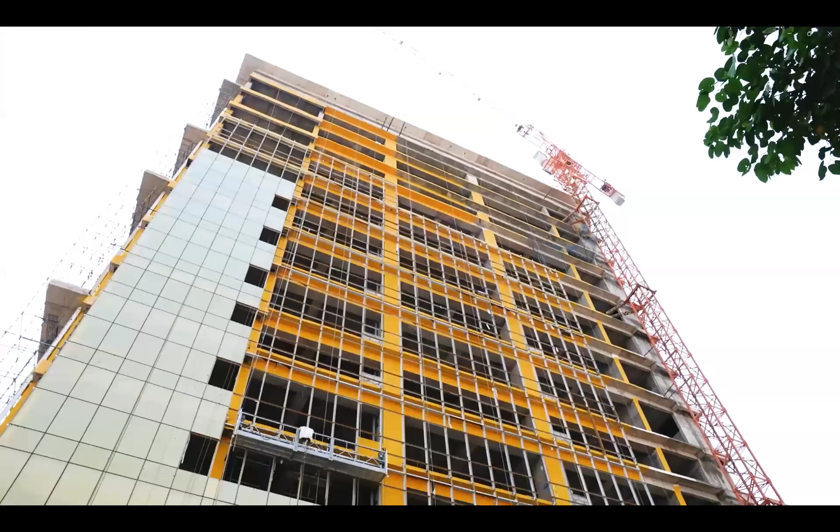The Indian Association of Structural Engineers, also known as IAStructE, was conceptualized and constituted in the year 2002 by a group of senior professional structural engineers from all over the country. IAStructE is registered under the Societies Registration Act 21 of 1860. IAStructE is a national apex body of structural engineers in India with a mission to promote structural engineering profession and cater to the professional needs of the structural engineering fraternity.

In the short span of two decades, the association has attained an eminent position in the professional field. Its membership is valued very highly in the profession. Since inception, IAStructE has been led by eminent structural engineers like late Shri Mahendra Raj, late Shri Kumar Ghosh, late Shri Subhash Chand Mehrotra, Professor Mahesh Tandon, Shri Manoj Mittal, Professor R. Pradeep Kumar, and Shri Alok Bhowmick as its president.

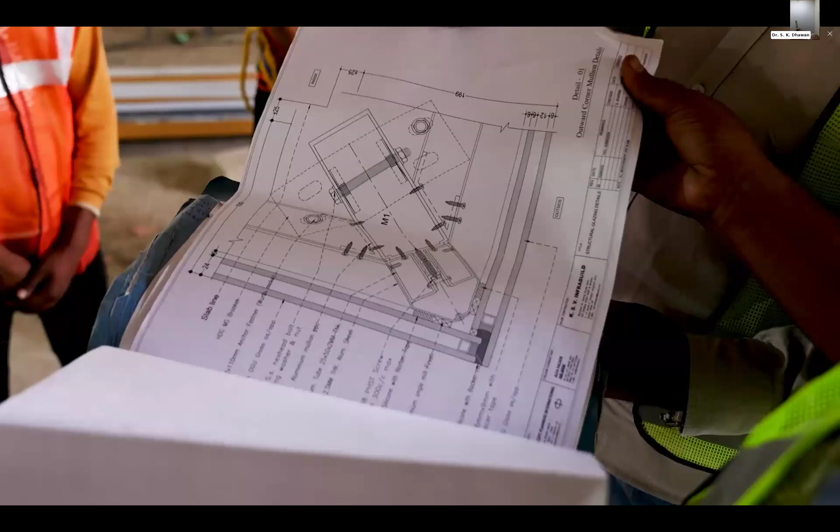IAStructE is a permanent member of the Engineering Council of India and interacts with the government on professional and policy matters related to civil and structural engineers. To expand its reach, IAStructE has collaboration with various international professional like-minded associations and institutions like IStructE UK and FIB for strengthening global connections and professional exchange.

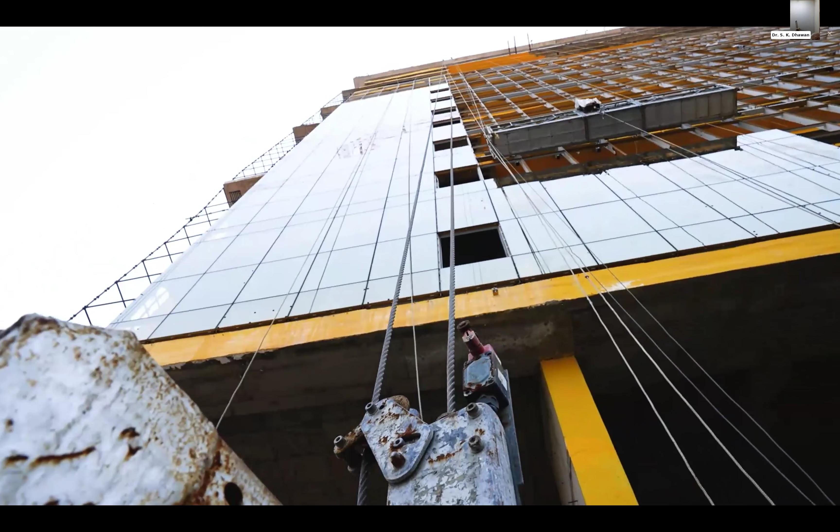IAStructE's prime objective is supporting and protecting the profession of structural engineering by upholding professional standards and acting as a mouthpiece for structural engineers in India. IAStructE endeavors to ensure that its members develop the necessary skills in structural engineering and work to the highest standards by maintaining a commitment to professional ethics and standards.

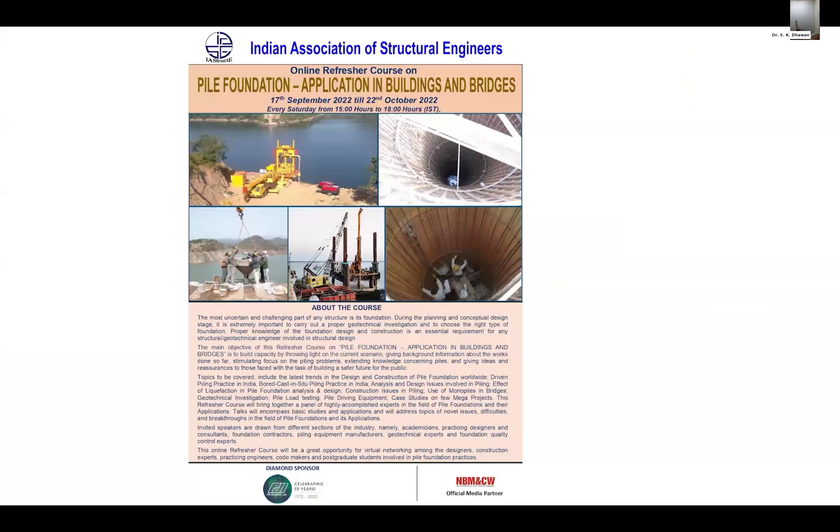IAStructE is actively engaged in organizing several continuing professional development (CPD) courses for structural engineers to help them update their knowledge and advance their career paths. It also conducts refresher courses for young and practicing engineers and student-oriented programs. Seminars, workshops, conferences, technical lectures and discussions related to the latest technological advancements and case studies are also organized regularly for members to enable them to continuously update their knowledge and skill set by interacting with the best minds from the industry. IAStructE's activities are widely appreciated and known for quality technical contents.

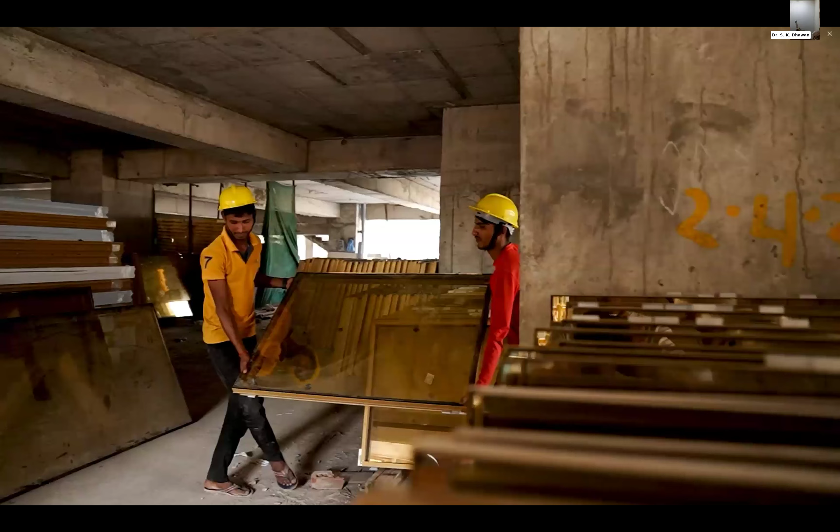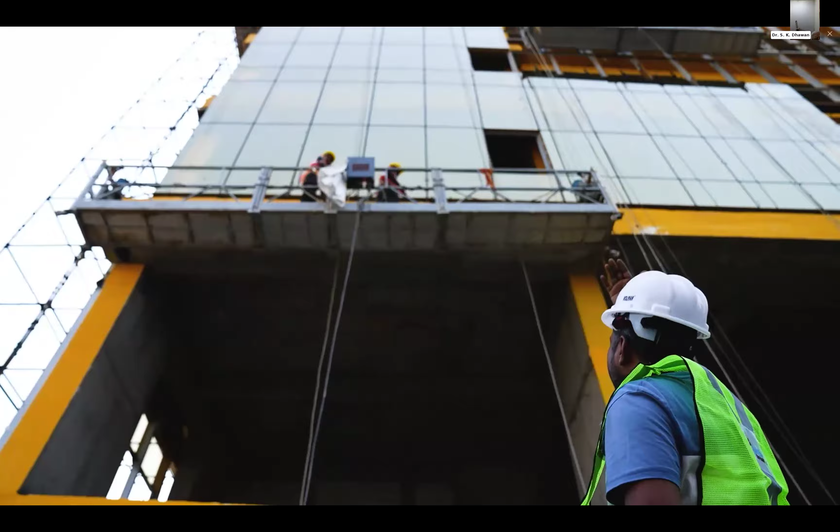In the year 2020, IAStructE started the National Awards competition to stimulate interest in the structural engineering field and to promote innovative thinking and creativity. The awards are presented to the winners in recognition of their outstanding contribution to structural engineering in the categories which include Outstanding Structure, Outstanding Structural Engineer, Outstanding Woman Structural Engineer, Promising Young Structural Engineer, and Best Master's Thesis in Structural Engineering.

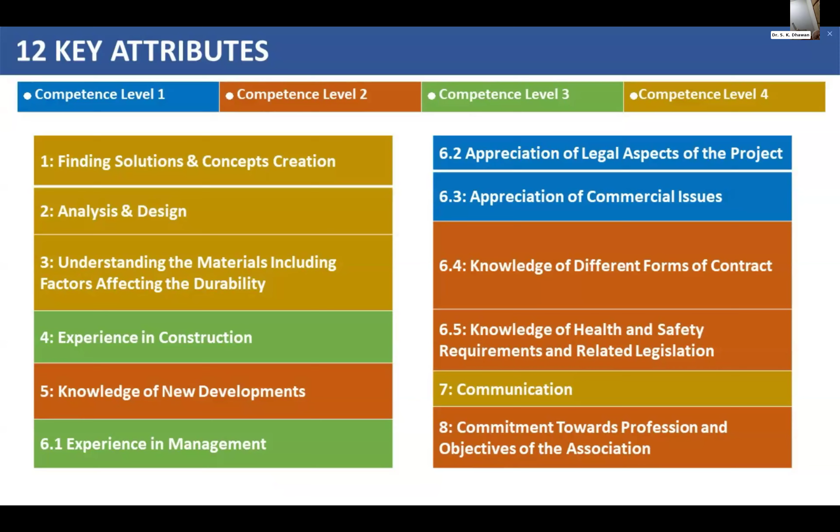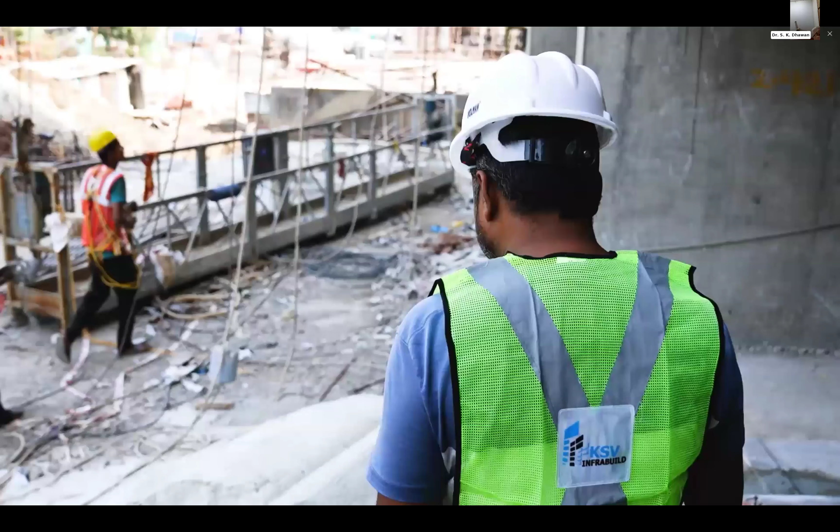Reaffirming its commitment to professional excellence, IAStructE launched the accreditation program in 2023. This flagship initiative empowers practicing engineers to evaluate their competencies, identify growth opportunities, and strengthen the foundation for sustained professional success. IAStructE is currently operating from four regional centers, namely Eastern, Western, Northern, and Southern, having its headquarters in Delhi, to inculcate the professional culture and provide hand-holding to the budding engineers.

Joining IAStructE offers exclusive resources, mentorship, and networking with industry leaders. Members enjoy discounted registration for workshops, seminars, and events, along with discounted membership of FIB, opportunities for certification, career guidance, leadership roles, and enhanced professional recognition.

IAStructE has its student chapters in several leading engineering institutions as well. Membership of IAStructE is open to all civil and structural engineers engaged in the structural engineering profession. Members are elected based on their qualifications and experience in different grades as per eligibility requirements prescribed in the bylaws. Each application is carefully scrutinized before electing the members.

More information about IAStructE is available on its website, www.iastructe.co.in.

Vikas, shall I proceed? Yes, sir.

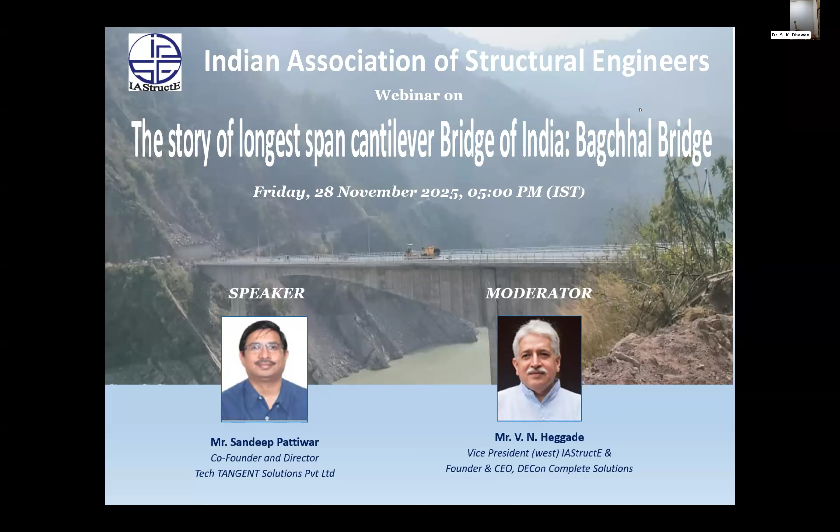Now, over to Engineer Heggade for further proceedings. Thank you, Dhawan Saab, for those kind words, and to get such an introduction from you is an honor for me to start with. Thank you.

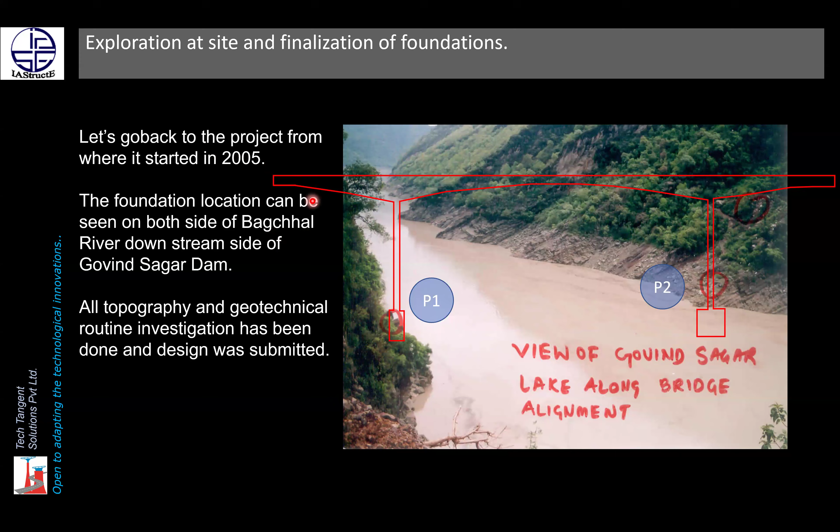So at this location, this is P2. The span is almost 185 meter, and at this site it is a 71-meter span, Marotan side, and Swarghat side. As the hill is coming here, we could only stretch our span to 60 meter. So that was the initial configuration we decided.

So let us go to the history, in the sense that with 185 meters, one of the biggest cantilever bridges, when someone thinks about it, they think how it should be done, what the configuration is, what kind of pier should be there. The first proposal was an A-shaped structure, and the foundations were far apart here, if you can see, and the excavation planning was developed for how this would be done.

If you see, this founding level is almost 30 to 40 meters deep below, cutting the rock. This was a kind of shaft where the open foundation would rest, and then the tall piers, and then the superstructure you can see. The challenge was that water is present most of the year, and only 4 months were available for the construction of these foundations.

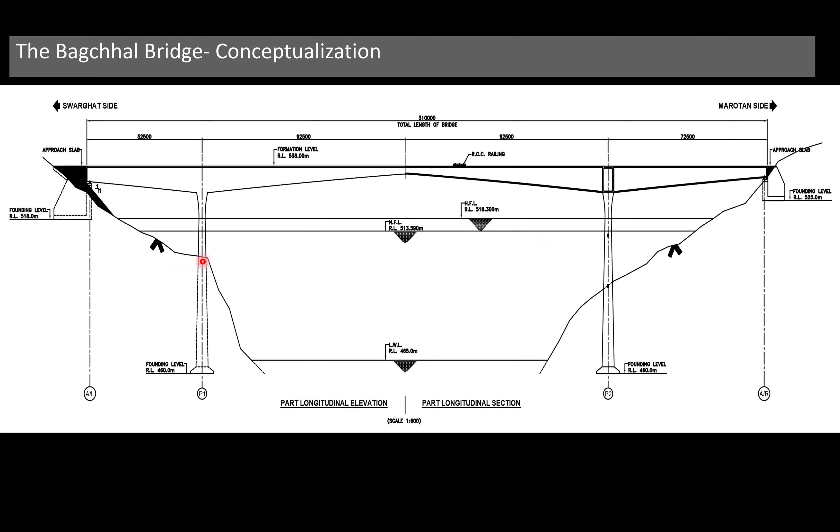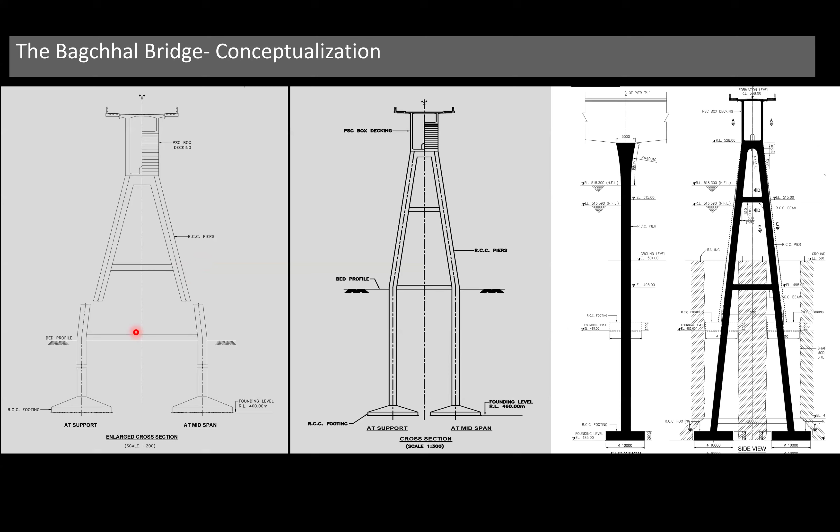And it was not feasible to provide a kind of foundation where you need a lot of area to construct, and the seismic zone, as it is zone 5, seismic forces were increasing, and foundation sizes were getting higher and higher with the stiffness of the structure. Geotechnical investigation was done. If you see, the founding level 460 was supposed to go from 483. So there were almost 25 to 30 meter deep foundations.

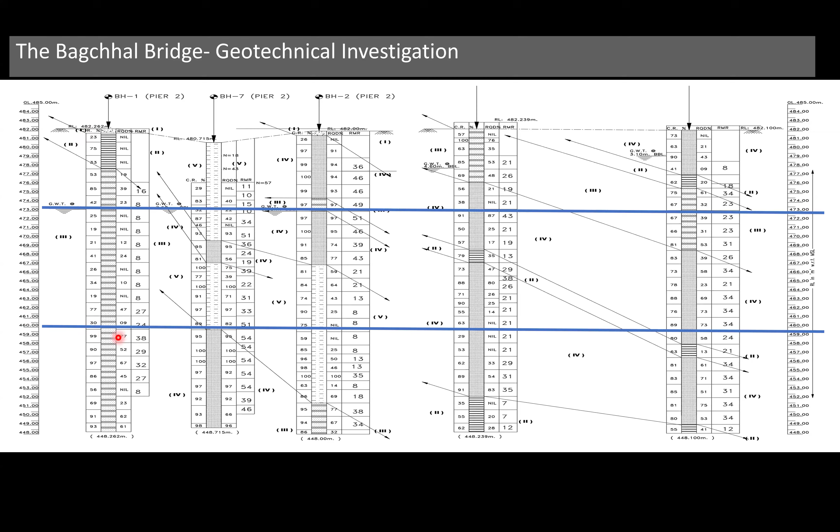Construction started, planning was started. This is the location and level of the loose strata, and if you see, the P1 strata and P2 strata are completely different. P1 has a lot of fractures, a lot of rock with inclination in different directions, whereas P2's crushing strength may be lesser, but it was more uniform than P1.

Geotechnical investigation derived the bearing capacity of both the strata at P1 and P2. At P2 it was 80 ton per meter square bearing capacity, and at P1 it was 60 ton per meter square as per the geotechnical report. Why am I saying this? This will have a future repercussion, and we'll discuss it later.

Looking at the construction aspect, after detailed planning and taking consultation from the site, a shaft foundation was decided, which is not normal in India, but maybe in Europe it is a regular foundation type, where you excavate up to the founding level and the shaft is created in rock with a uniform diameter.

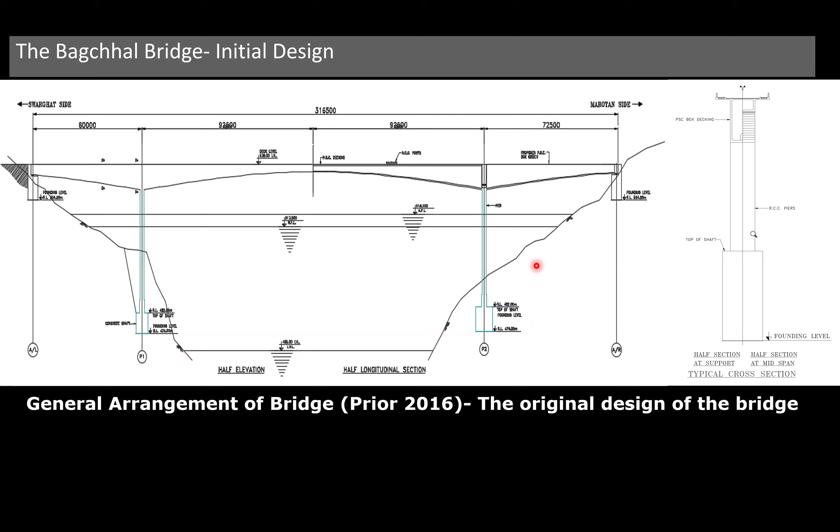When construction actually started, considering the time period, duration, type of rock, and founding strata, altogether it was decided that this foundation would be taken a little bit higher. The rock profile you can see in this photograph actually became like this during construction, and the site constructed this foundation, not to scale, indicatively, and these piers were constructed.

A cantilever of 58 meter on the P1 side, and a cantilever of 42 meter on the P2 side, were constructed by the balanced cantilever method.

During a regular site visit, when it was decided to check whether the construction was going as per the design or not, we went to site and inspected this foundation. We found that the depth or passive zone required, the embedment, or the resistance which the soil was required to provide for the shaft foundation was not available.

Red flag was given. It was decided together that this foundation should be stopped before further investigation was done. All geotechnical investigation, or you can say the geo and structural investigation, was required before the start of further work. It was halted at that time.

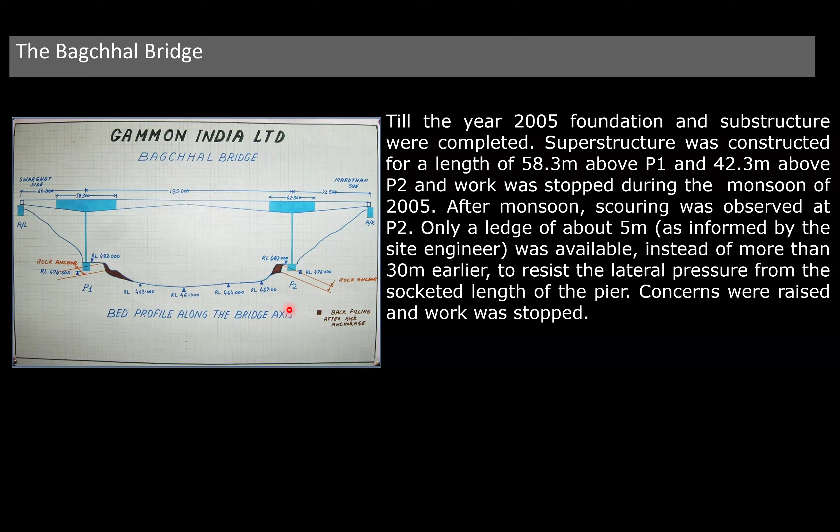You can see P1 is constructed almost around 58 meters, and P2 was almost 42 meters before construction stopped. The most challenging part, as you see, the foundation is much below the water, and to do any further work or repair, we got only 4 months. Within that, we have to do the foundation.

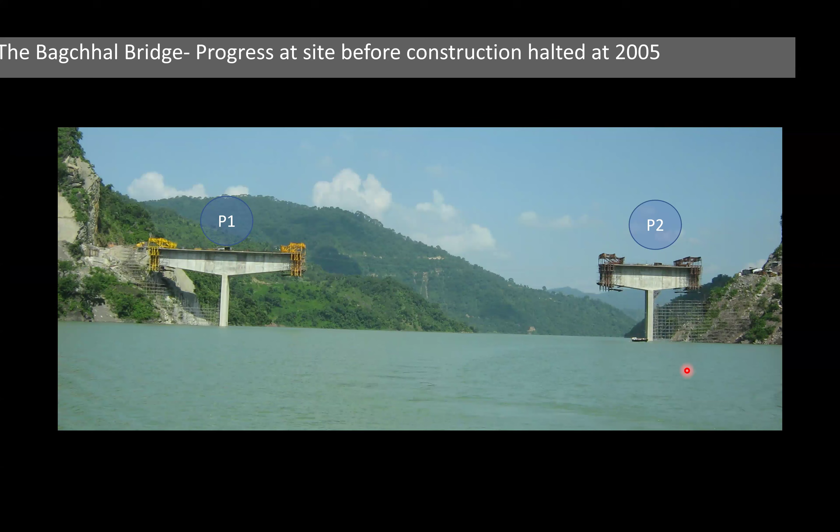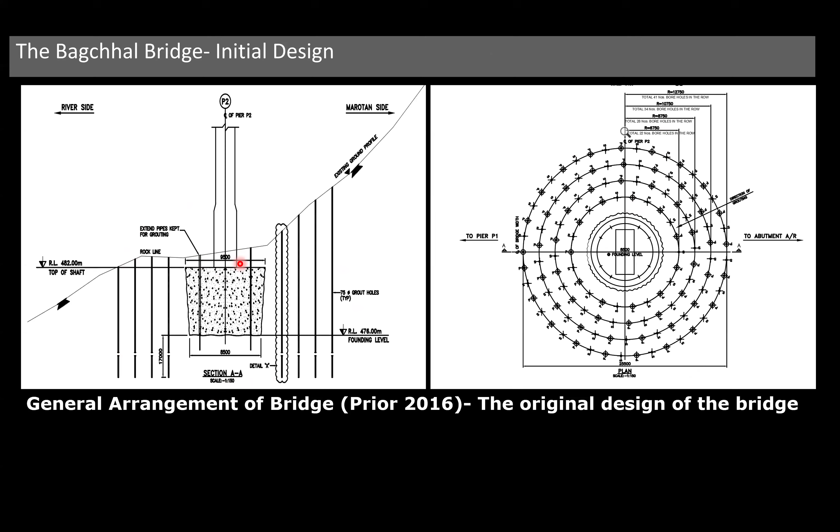As you see, actually, in 2013, when it started to be reviewed, first of all, the condition at site was completely changed. Now, it was almost cut here. This topography was much flatter, and at Swarghat also, the hill which was there is far away from the earlier AL.

The proof consultant and we together decided that we should extend the span, at least it should be symmetric from P1 to P2. That's why on the Swarghat side, we have made a further increase of 12.5 meter length.

Generally, for a cantilever construction, we have a ratio of this front span and this back span of around 0.6 to 0.5. That is, suppose if it is 180 meters, this should be 180 into 0.6. However, 72 was still not within that range. That was the maximum length we could stretch it.

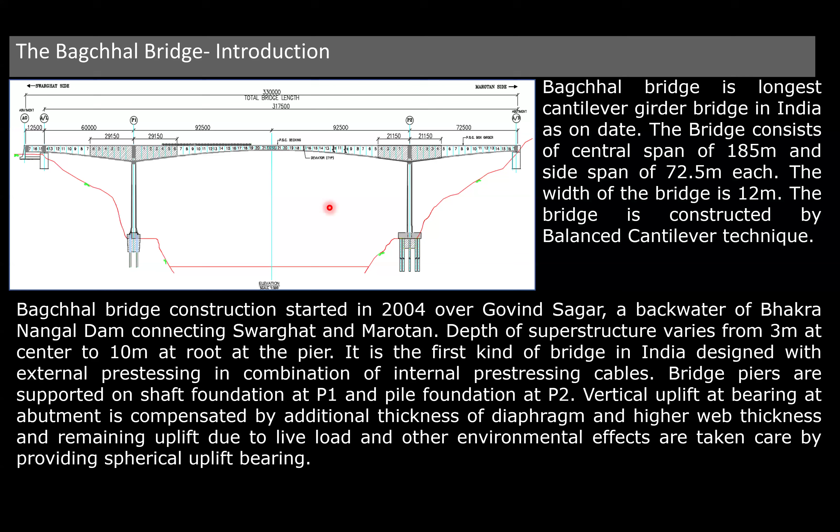So after the deliberation, this is the final general arrangement drawing. You can see the salvaging of the foundation at P1 is done as shown here. It is by the rock anchors, and at P2, it is done by the pile foundation. Again, the span is increased here from AL to A0. So the abutment is no more at AL, but is transferred to A0 with an increase of 12.5 meter length.

So spans are now almost symmetric, 72.5 meters on the Swarghat side, Marotan side also 72.5 meters, and the central span is 185 meters.

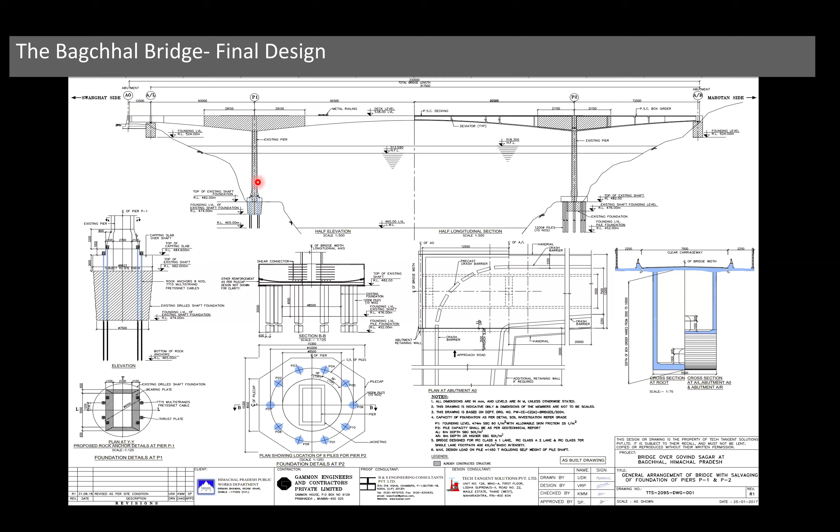For any rehabilitation or any start of activity, again, this core test is a very important part. So when we went to site after a gap of almost 7-8 years, we decided that we should do the core test at different locations of the pier, superstructure, and abutment, the box kind of abutment which was already done on the Swarghat side.

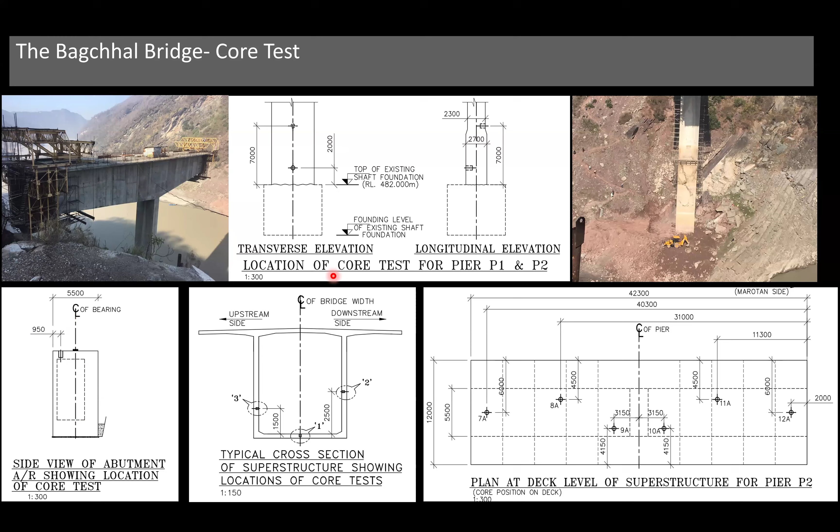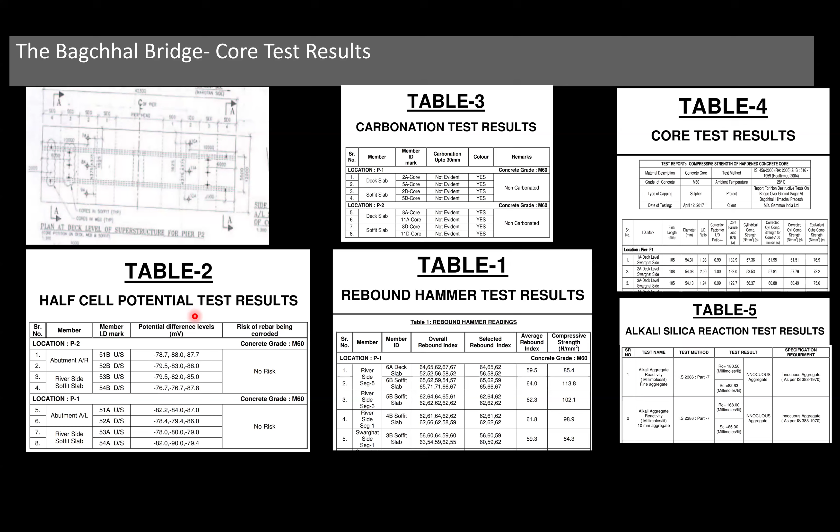So we have taken this core test, and results were fabulous in the sense all results exceeded expectation, whether it is the carbonation test, the rebound hammer test, the core test result, the alkali silica reaction test, or the half cell potential test result for reinforcement, all passed with flying colors. So despite a very remote site, quality control was the best, I will say, at this location.

Let us understand external pre-stress before we further discuss the bridge rehabilitation, retrofitting, or salvaging.

Typically, suppose there is one beam, and if there is a vertical load in this direction, it will deflect downward. But if the pre-stress component is upward, it will go upward. So that is the concept of pre-stress. I will say that it opposes the direction of the dead load, whatever the general moments are.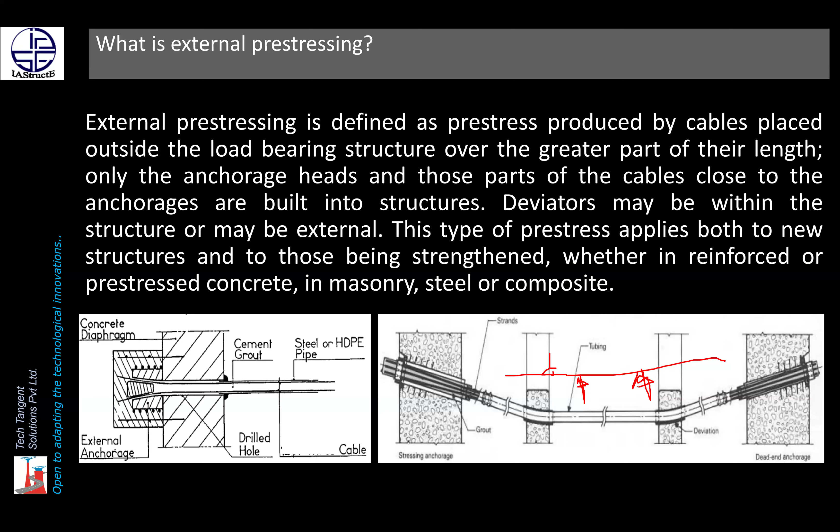So if it is a downward moment, it will lift the structure up, and if it is an upward moment, it will push the structure down. In a cantilever structure, both phenomena happen, and we have to utilize external pre-stressing for it. There are some advantages of external and internal. With external, we have to be very careful, as it is not embedded in the concrete. There is a sensitivity to corrosion. However, it can always be tackled by changing the grout, or other measures can be taken.

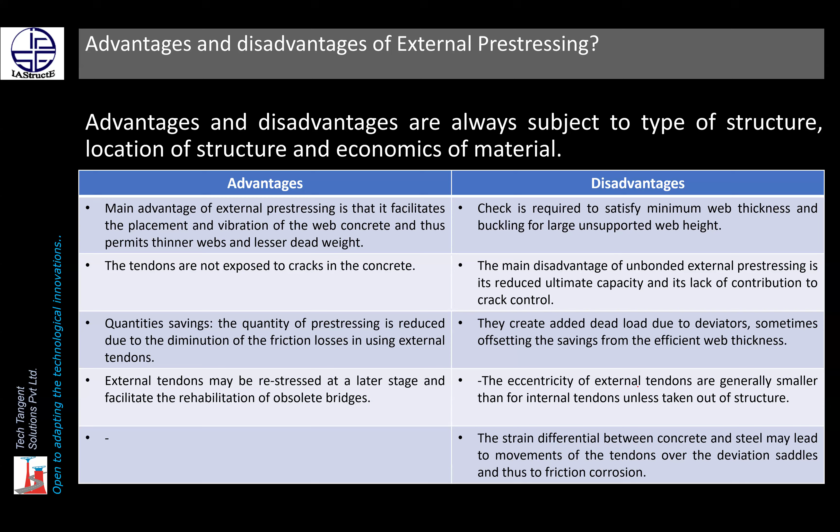The main advantage of external pre-stressing is that these cables are outside, and you can actually reduce the pre-stressing force because friction and wobble coefficients are a little lower. That gives some advantages. You can reduce the thickness of the member. That was the most important reason why we decided external pre-stressing should be used for this Bagchhal bridge having a 185-meter span. When we were finalizing the... I will come to that a little later. Let us first understand external pre-stressing.

What is that? Actually, when we say extradosed bridge, it is a kind of external pre-stressing. The only difference is that when the pre-stress is within the depth of the box, it is external pre-stressing, and when it is above the bridge boundary, it is called extradosed. That is the major difference between external pre-stressing and extradosed, because extradosed means we are giving more power to the structure with the same cable.

That's the philosophy. So Bagchhal bridge was not the first bridge of its kind where external pre-stressing was used. You can see that in 1926, the Basin Railway Bridge in Germany used the external pre-stressing concept. Whether we call this extradosed or external is only a difference of terminology, but the purpose remains the same: we are giving extra power to the structure, it is not embedded in the concrete, and it gives more power to resist the moments.

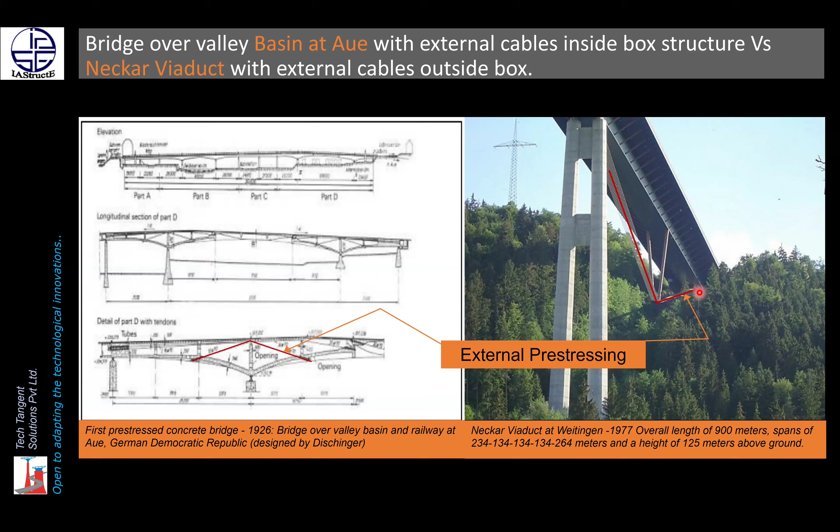Typically, these are all inclined tendons, and apart from the inclined tendons, you can see the external tendons deviating from top to bottom. The advantage is that the same cables can be utilized from top to bottom moment, and the deviation of the moments and forces can be taken by the deviator. Generally, the deviators are placed at a location where the cable needs to change its path, unlike in our regular internal cable bridge, where we take the cables inside the structure and not outside. So that is a very important difference: these deviators have to be designed for the forces arising out of the deviation of the cables to take the different kinds of moments and forces.

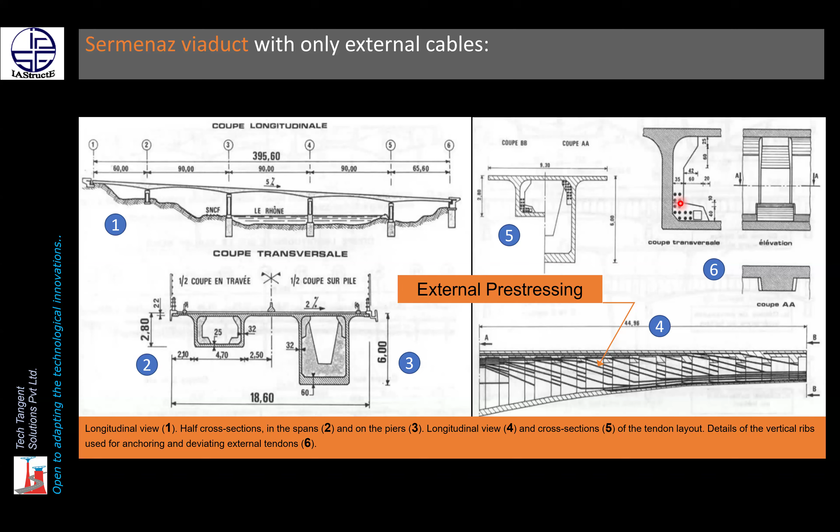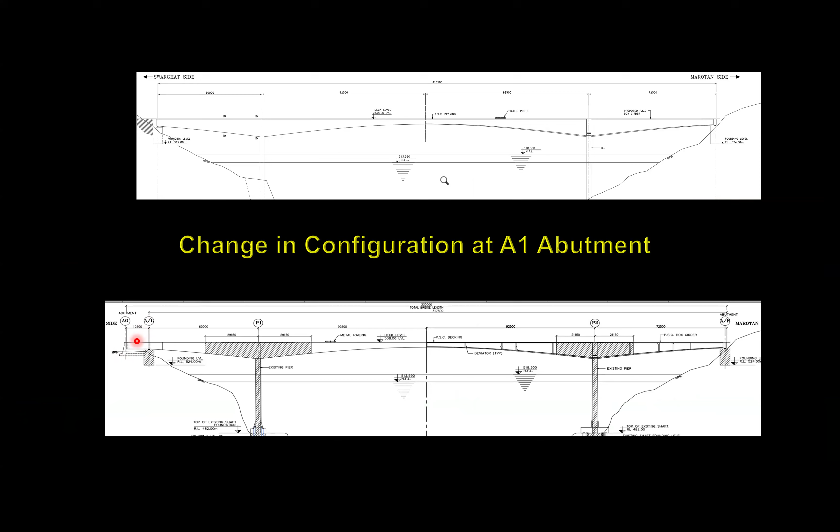Now, after external pre-stressing, let us understand: when we did the site visit, the first thing we did was change the abutment location. That was the earlier arrangement. You can see that it was to be held down by a pre-stress mechanism. When we reviewed it further, because this length is very small, maybe 5 or 6 meters, pre-stress doesn't work in this shorter length. Either you have to use high tension bars or some other kind of thing. But we thought sustained uplift would cause fatigue, and it was not a good idea to provide such a mechanism for 100 years for such an important bridge.

So by balancing the structure or increasing the arm a little more, it is a simple abutment with bearings, placed to safeguard against uplift under non-frequent load, because under the frequent load, uplift was avoided, and under the rare load it is allowed. So those kinds of bearings have been placed. Despite that, at one location, P1, we could not completely avoid uplift under frequent load, under the combination with wind, and we have provided special bearings to resist this uplift for the 100-year lifetime of the structure.

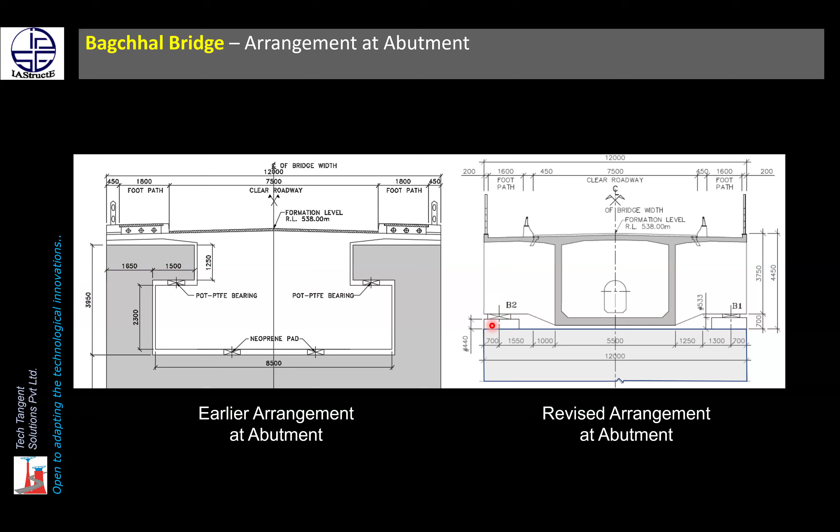So you can see the earlier abutment was at A1, and the road was almost 90 degrees during the earlier concept. However, when the rehabilitation started, this hill is actually a little bit farther away. So the length is increased by 12.5 meters, and this road is contoured per highway guidelines, and as best possible we have designed this path.

One special thing to be mentioned here: typically we provide an expansion joint like this at a transverse location, or the transverse section of the bridge, but we needed to provide an expansion joint along the longitudinal path. They were going simultaneously, and the same movement, say here maybe 100 mm, 120 mm, was required for this phase also. And that was actually a big challenge, how to provide an expansion joint in such a way that it works very nicely.

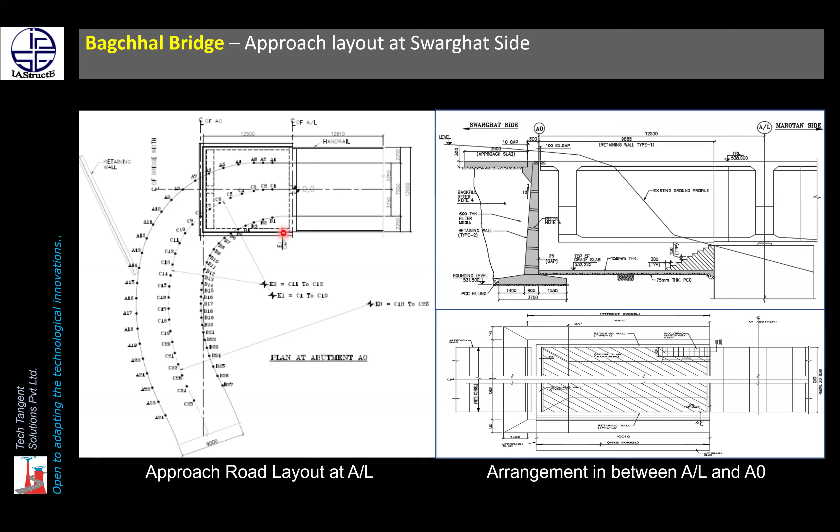So you can see, the mass required for the mobilization of the P2 shaft, which is not transferring those forces from the base but taking resistance from the side, was not available at the P2 location. Maybe the soil strata, rock, which we thought was good geotechnically, could not sustain one cycle of water variation, and that's why we thought we have to review the foundation.

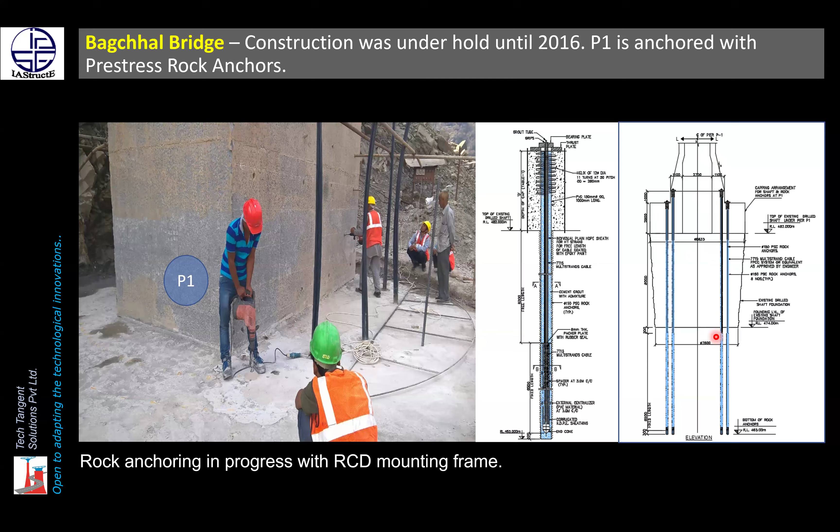So this is indicatively after the construction. You can see the outer mass, the outer jacketing, which is holding this foundation at the bottom. Rock anchors were decided in such a way that these forces, moments, lever arm can be transferred into deeper action. In blue we can see the pier, and in yellow we can see the jacketing. That is why these rock anchors are made monolithic with the pier foundation.

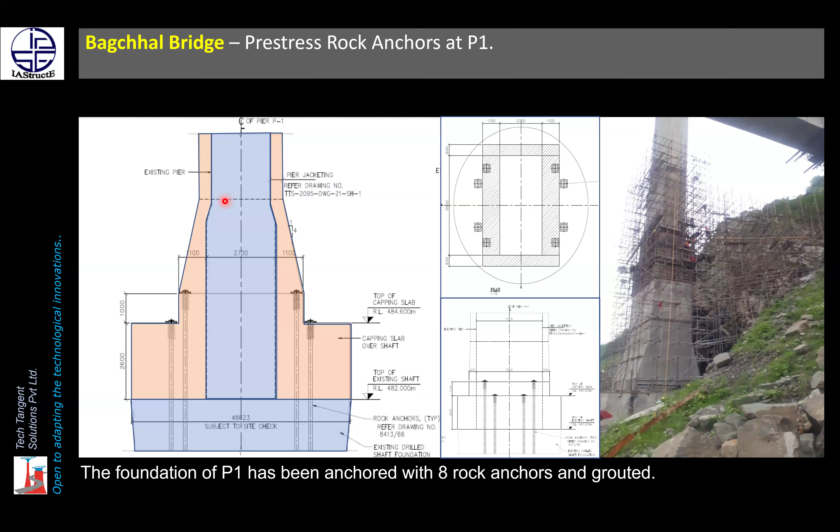The challenge was again always the duration of time. So we had to do all those things as parallel activities, not only for P1 but for P2, because only 4 months were available. All geotechnical stiffnesses were considered. Plaxis and other software were used, where geotechnical and structural interaction was done to see whether these forces can be transferred to the deeper strata from the pier and shaft foundation.

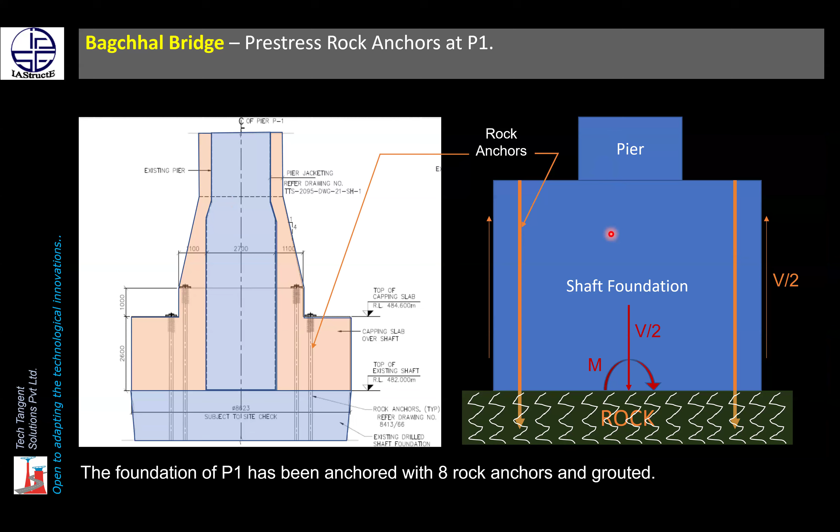The next challenge is the pier which is already done: if we want to do the jacketing, how to avoid the reinforcement. So special experts were called, and they scanned the reinforcement before drilling each bar. And we don't want to make the pier very weak in cross section. So care was taken that all holes in one row will not be drilled together. A set of guidance was given so that once the bar is drilled, it has to be grouted, so that with the active load coming on this pier, as the cantilever is already constructed on those piers, the load capacity should not reduce. It has capacity, but we don't want to take advantage of that.

Minimum 500 mm length; maybe the rock anchor requirements come out very less, but a minimum requirement was given. And if it is more as per chemical grouting or the different anchors, then it should be more. Otherwise 500 minimum has been provided.

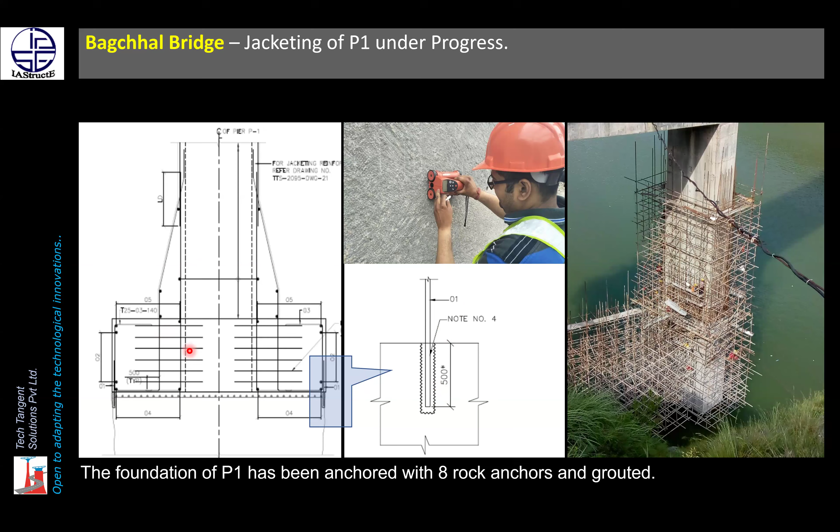So you can see here, I will come to the next slide, which is P2. Much denser foundation reinforcement is there, and it was a much bigger challenge at the P2 side. So if you see P2, which as per us is the most critical foundation, where we have to transfer the load into a deeper foundation from the shaft foundation, which is not fitting into the aspect ratio, not transferring the lateral moment, socketing moment.

Now, the most challenging part: how to connect this pile cap to the already existing pier so that all moments are transferred. It was deliberated for long whether the shaft foundation, which also exists here, will contribute and take the load or not. All geotechnical calculations, resistance, but it was ultimately decided that these piles are embedded much deeper, they are much more rigid, and if the soil underneath the shaft foundation becomes loose, all load will go to the piles.

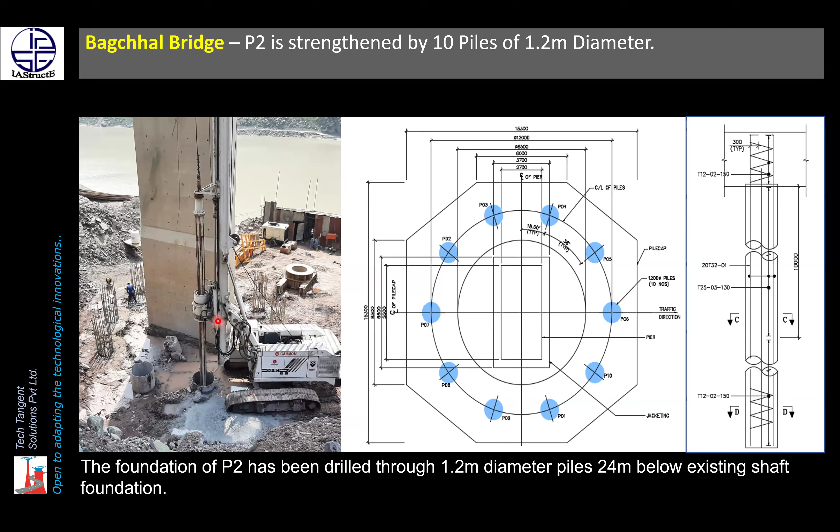Now you can see the site here, and you can see the design here. It is an octagonal kind of shape of the pile cap. Piles are shown here, and these cables are there. Now imagine that the shaft is already constructed, and we have to drill the holes through the already cast pier, avoiding the reinforcement, and this is not something like 1 meter or 0.5 meter.

It is almost 2.6 meter at this location, and scanners, digitalization and modern tools were used so that reinforcement cutting can be avoided, and accordingly continuous interaction with the site was done so that as little drilling as possible is done in the pier, and other cables were placed outside so that clashing can be avoided. So you can see 1, 2, 3, 4, these cables are going through the pier, and the other prestressing is going outside.

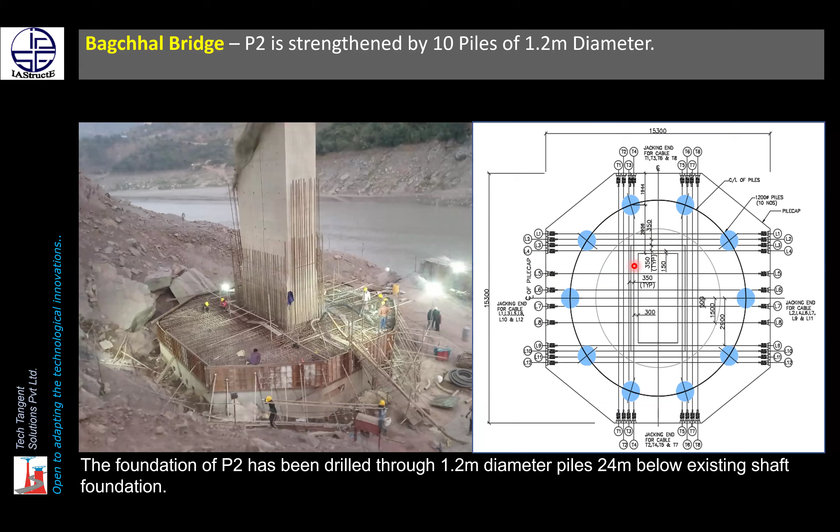Apart from that, the shear reinforcement and all those things were there. So you can see the pockets here for the cables, and at the side it is very visible. In fact, this pile cap was not done in one complete operation because water suddenly came. So it was done in the water season, but it was done completely successfully.

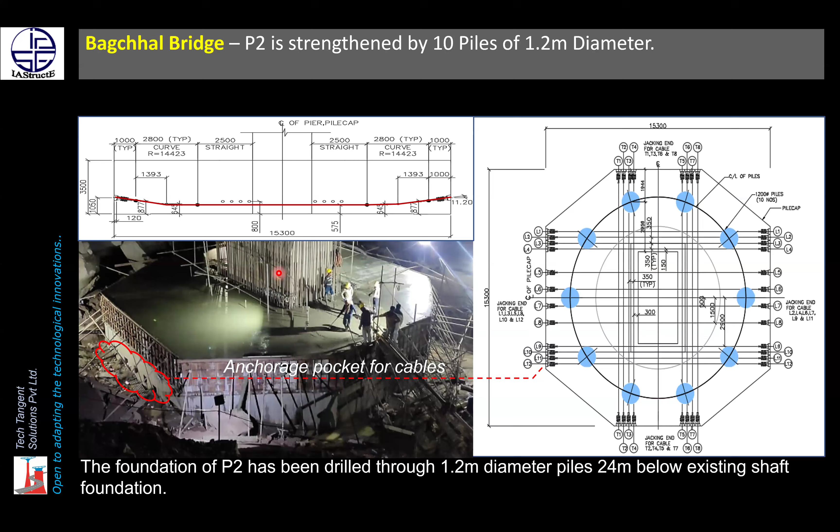So these are just indicative sketches showing how the drilling and all those things were done. Jacketing was done. And here, shear connectors were provided on the face of the pier before casting this pile cap. Now you can see the shaft, the pile cap and the pile. So the shaft load first goes to the pile cap and then to the pile. It looks like it is hanging on the pile cap and then going to the pile.

This load itself, if I remember properly, was not very less, something around 700 to 800 ton. And more than the other loads, it was also a very heavy load for the design of the pile foundation.

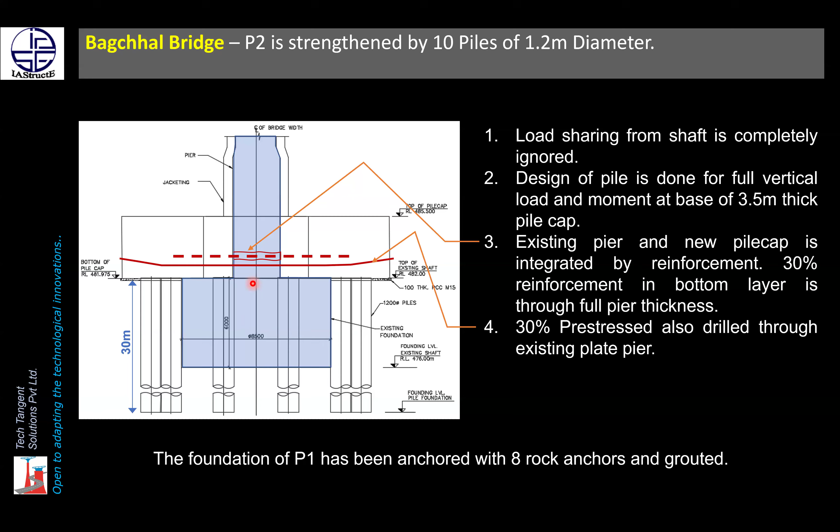At this stage I will say that, if you look at the bridge, when the bridge design was started, it was the working stress method. And when salvaging was finally decided, it was by the new code, which is the limit state method. So those piers were checked for the limit state method, and it was decided to do the jacketing.

So for jacketing, again, typically VAY/IB is the conventional formula, whatever derivation there can be, but by that method the difference of the forces which the pier is taking, and with further jacketing, how much moment and force will come at this interface were calculated, and these shear connectors have been provided. That was done throughout the depth for all combinations, whether seismic or any combination, the only difference being that it was done as per the new code, which is the limit state code.

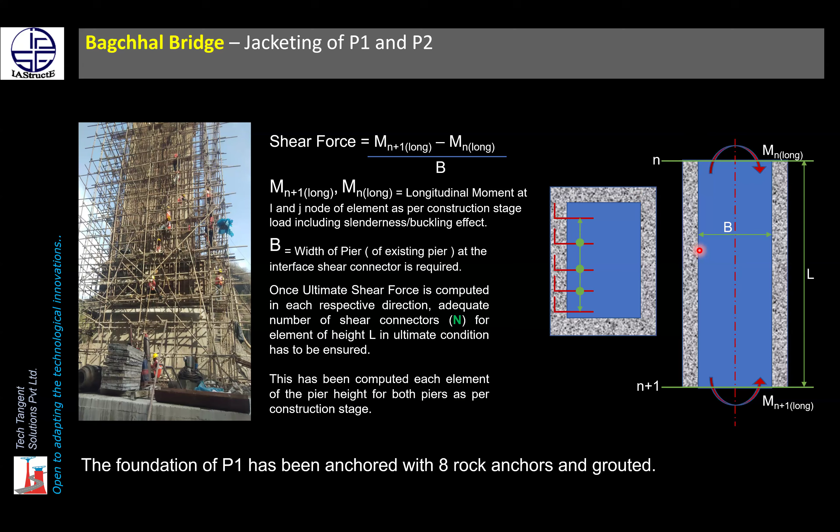Now, another challenge was that we have strengthened the pier, we have jacketed the pier, but we have to connect it throughout this superstructure. Otherwise, the purpose of jacketing will not be there. And already the superstructure was completed for a certain length, maybe 40 meters for P2 or 50 meters for P1. So how do we do that?

If you see in the longitudinal direction, the forces are transferring in a different manner. In the transverse direction, this web is thickened up to the top, whereas in the other direction, a hole was drilled through the soffit, and the whole thing was made monolithic in elevation. It goes up to half of the web, whereas in the transverse direction it goes up to the full height of the web.

You can see the reinforcement going here, because all the moment required has to go through this section. The soffit is already cast, so we have to bend the bar like this, not exceeding a slope of 1:6 or 1:8, and then make a hole here, one by one, so that we don't compromise the strength of the box. Then it is taken up to the top, and then it is jacketed.

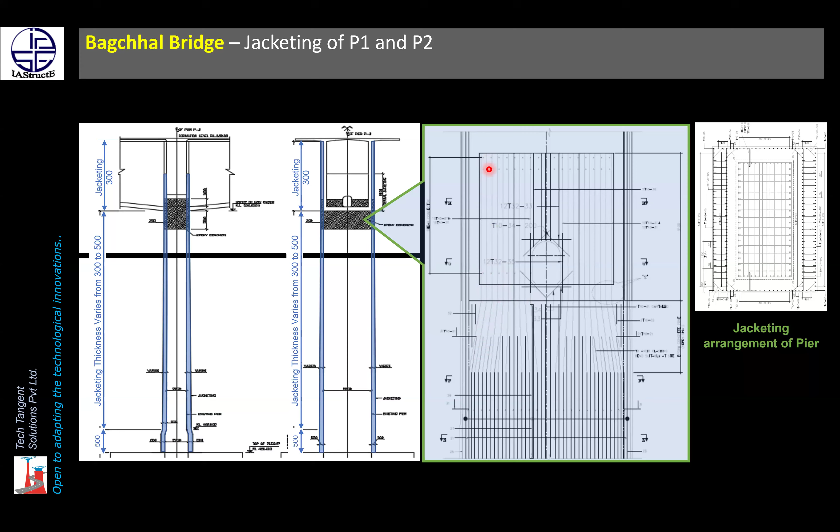Now, with the change in the superstructure configuration, earlier it was 60 meters, then it became 92.5 meters. The forces, creep, and shrinkage at different stages are coming now because the construction is already over, and now new construction will be happening. So the difference in age at P1 and P2 has to be considered as per its stage of construction. So all this rigorous analysis was done, and then it was adopted.

The main thing is these are the internal cables. This cantilever, if it starts from P1 and P2, your typical cantilever cables happen for a balanced cantilever construction—maybe 3 meters here, 3 meters here, another length of segment here, another length of segment there. Typically it safeguards the cantilever required for the dead load, and then the remaining load, if it comes, should also be taken care of. So that is the profile of the cantilever cables.

Similarly, for continuity, continuous continuity cables are placed here at the bottom, and the creep is a phenomenon where it relaxes. I'll take a parallel with a person sleeping here—initially he will resist transferring the load from P1 to P2, but after some time his back will start going slowly down, and that's why the bottom fiber also will go into tension. So that is my parallel for the creep load.

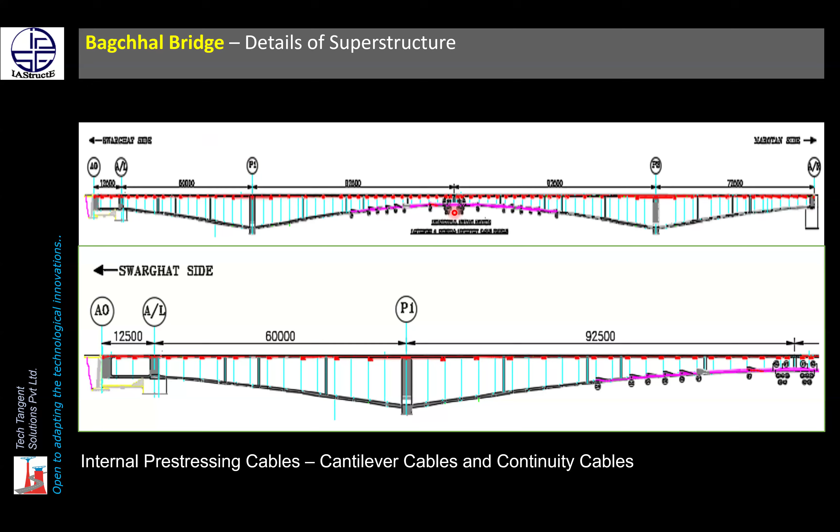This is the internal cable profile. Of course, a lot of cables are going from one point to another point, and the profile is done in such a way that they don't clash with each other. They have a deviation radius so that it doesn't exceed the limits, so that no additional reinforcement is required.

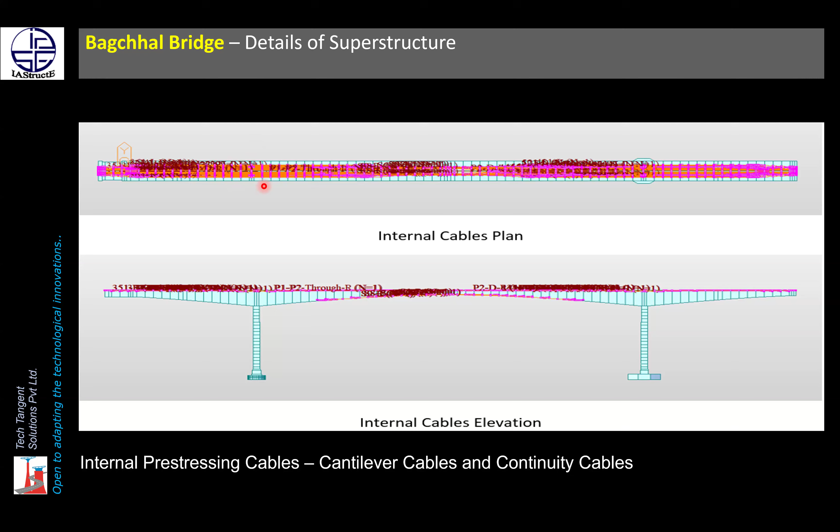If you see here, the reason for the external cable provision was that if we provided all internal cables, the thickness of the member was increasing so high—it was a cycle where increasing the bending moment because of the permanent load would make the number of cables go on increasing. So it was decided to provide a combination of pre-stress cables: one part internal cable, another part external cable, so that for the dead load construction, at least the internal cables can take care of it.

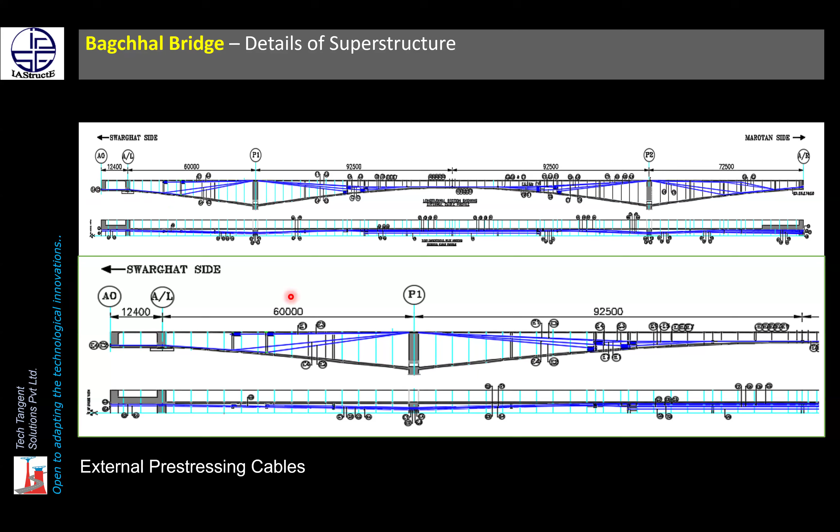Maybe there is some residual still remaining, and we will add the external pre-stressing without increasing the thickness of the members at the top and bottom. We take advantage of a profile such that where the demand is required at the bottom, we deviate this cable at the bottom, and where the demand is more at the top, we deviate this cable at the top. That is the beauty of the external cable - we can do it very easily. So that is why we have decided on the combination of internal and external pre-stress and the provided profile.

This is again a modeling photograph. If you can see and imagine, if we would not have provided these 4 cables, dead load will go on increasing, and it would have been very difficult to design the bridge. When we did the first trial, my cables were coming almost in 2 rows at the bottom of these layers. All this part was full of cables if I would have used internal cables. So either I have to increase the web thickness or deck thickness or something, and again the CG of the pre-stressing cable was reducing quite a lot.

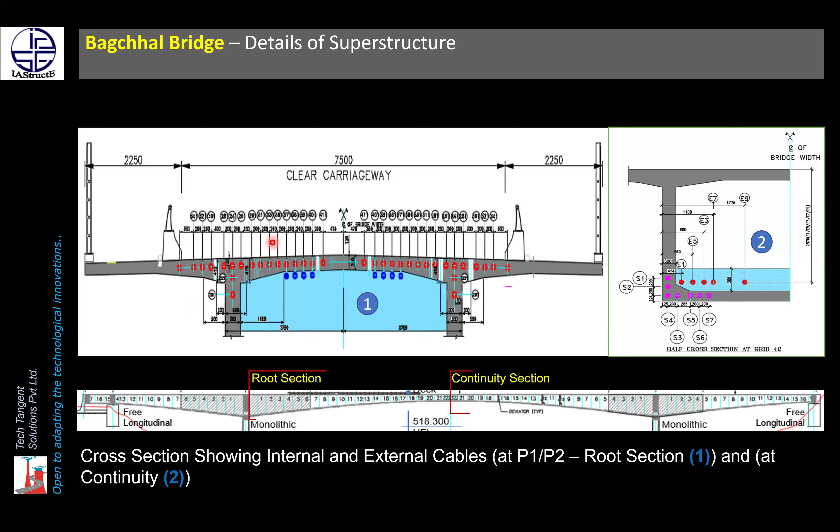I think you can see these deviators here - the location of the cables from where the external cable will go in and come out on the other side, and then further go to the location where the deviators are placed. Here you can see the central diaphragm from where these cables are coming at the top, and then a next deviator - they are located such that whatever demand is there, according to these, the cables are deviating at that location.

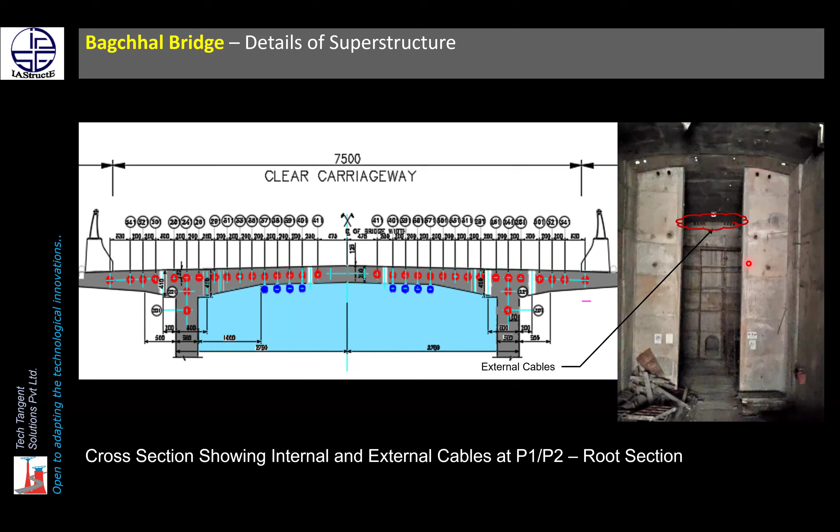In external cables, unlike internal cables where your cables are inside, deviation doesn't happen the same way as an external force. In an internal cable, after the grout, if any deviation or bending of the member happens, the force in the cable will increase, which itself opposes the normal phenomena - meaning it cannot happen unless the self-balancing system fails, or unless cable forces are reducing, only then will this bending happen. But in an external cable this doesn't happen that way. That is why in internal cables we don't calculate the deviation of forces, whereas in an external cable you will have a deviation in plan or elevation, and this force will come, and for that you have to provide detailing properly to take care of this - one is the force and second is the shear.

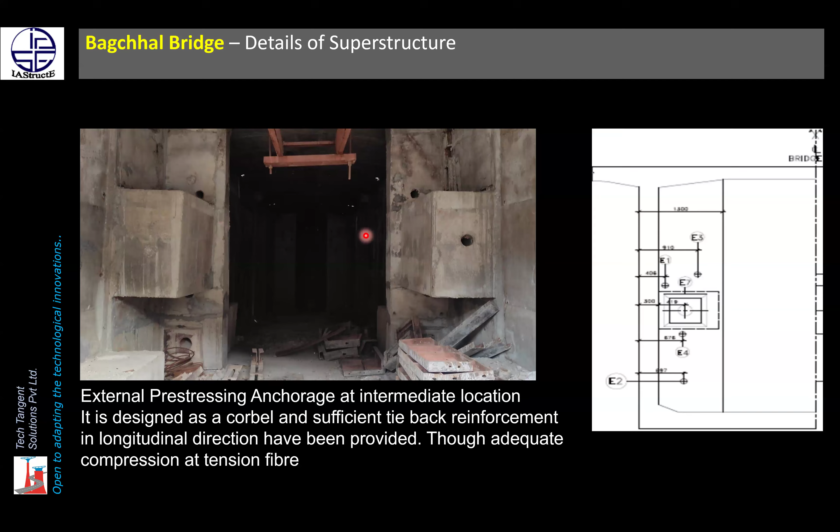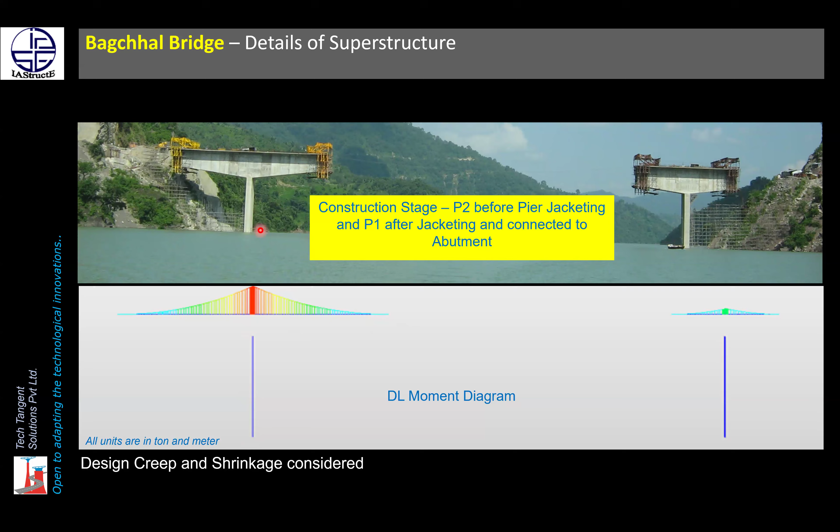So now you can see the photograph where this first part - now jacketing and all those things are done, and the further construction is in progress.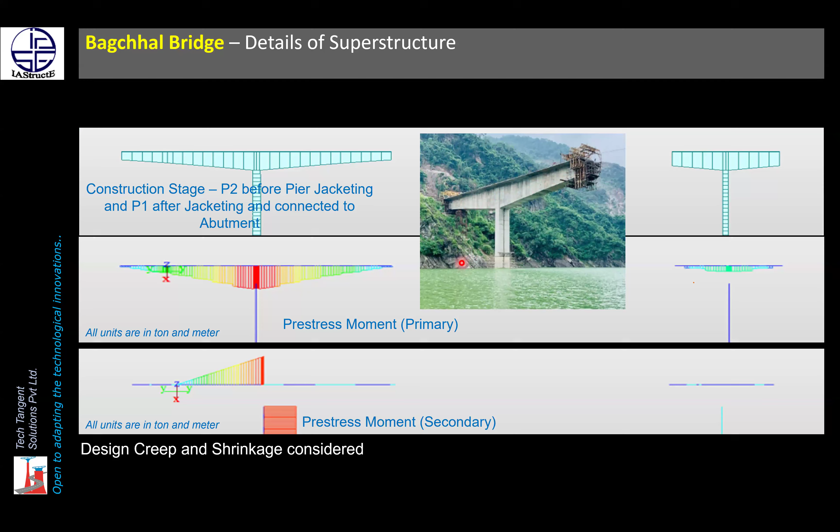Once the cantilever construction is complete, earlier in our case we have provided a trestle here, so that deflection and deformation are within limits, and that was continued here also. In cantilever construction, you can see this support here, it was a support during construction, and the bending moment is coming in this fashion during the construction. So this is a dead load moment.

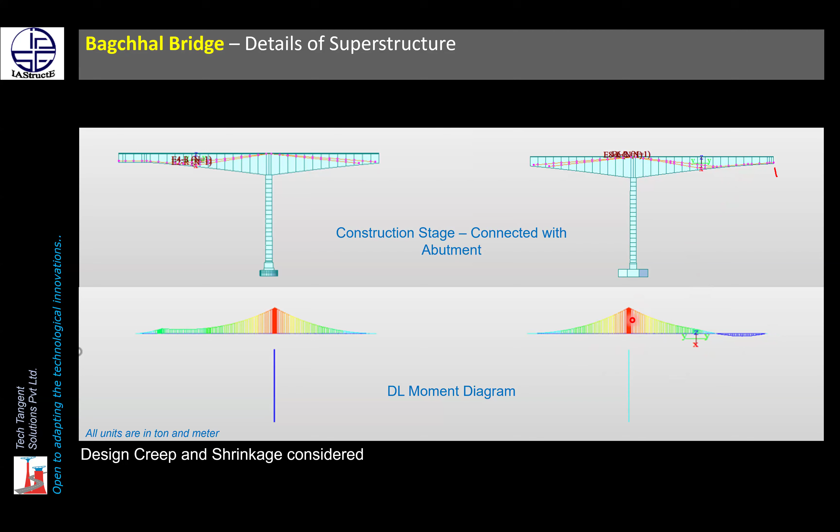Of course, pre-stress will be determinate unless there is no other third support, because this is already monolithic. As soon as you place another support, the structure will become from determinate to indeterminate, and the indeterminate structure's pre-stress will be different, and that will start acting on that. So this is the pre-stress bending moment you can see. If this would have been a cantilever structure, this reversal of action would not have happened. But as the cables are like this, here again support is there, so your pre-stress moments are coming in a different manner.

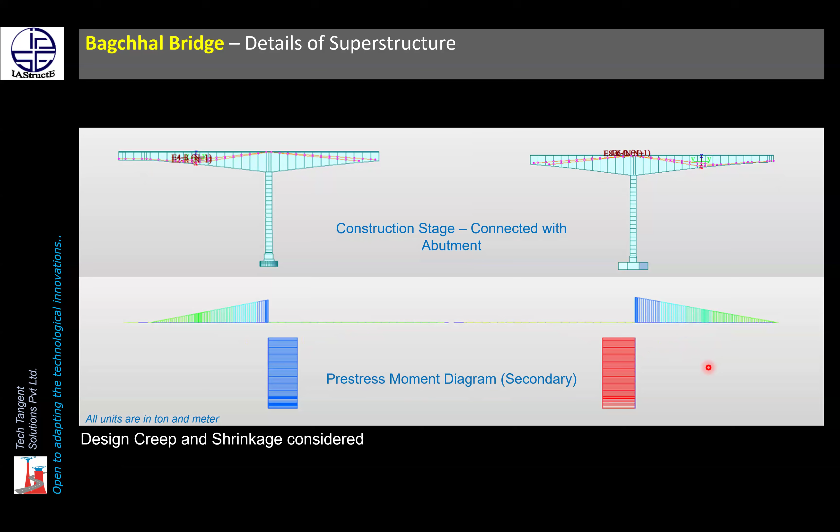Now finally, one is the ultimate capacity, which you have to check again by reinforcement. As I said, the superstructure was designed as per the working stress method. The difference in a limit state method is that we can take tension up to the flexural strength of the concrete, whereas as per the earlier working stress method, except temperature, in all other conditions tension will not be allowed. So that was the major deviation we have observed for this bridge.

However, as we have decided that this superstructure will be designed for working stress method, the yield or ULS method was calculated as per the earlier code, and by yield of steel and crushing of concrete, generally whatever happens. Only point to be mentioned here, external pre-stress doesn't act like a pre-stress. So when we calculate the capacity, external pre-stress will behave as an external force and not part of the pre-stress. So the calculation will be slightly different.

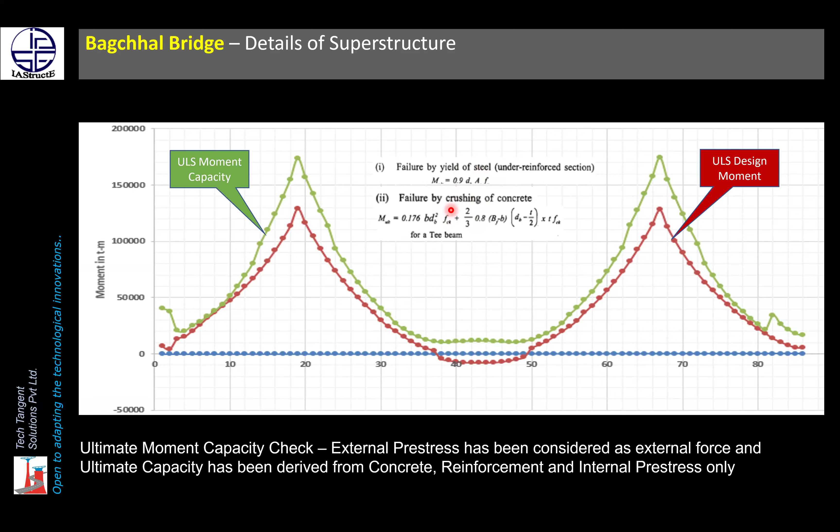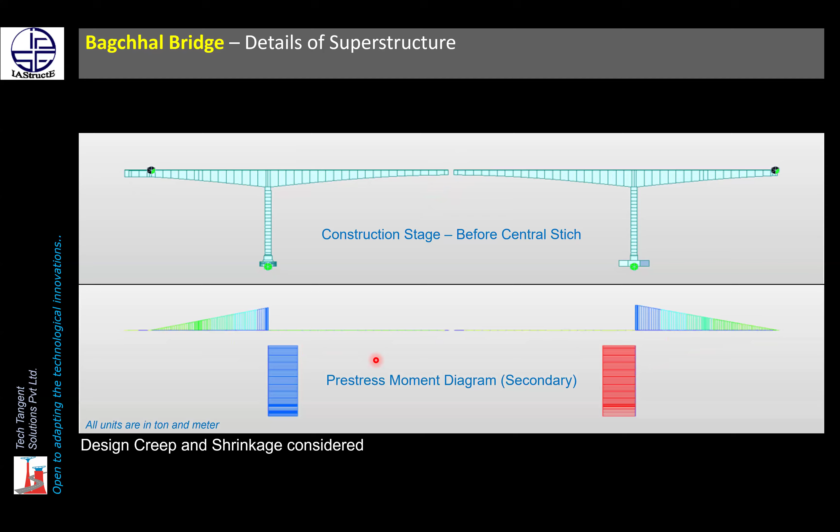This creep and shrinkage diagram is a software simulation. So this is before the stitch, I will say. All your construction, cantilever construction, is complete, then your abutment and piers are over, and then this central part is taken up by cantilever method. And just before the stitch, this is the stitch diagram for primary moment, pre-stress moment, and all other secondary moments and things.

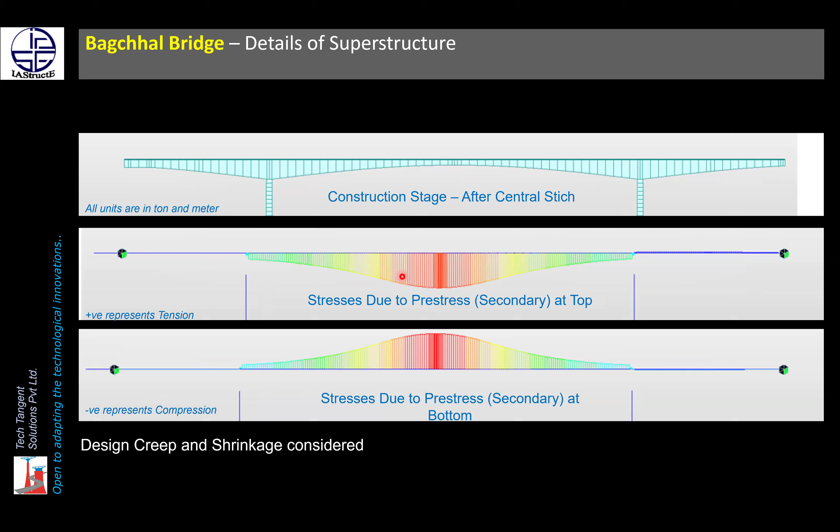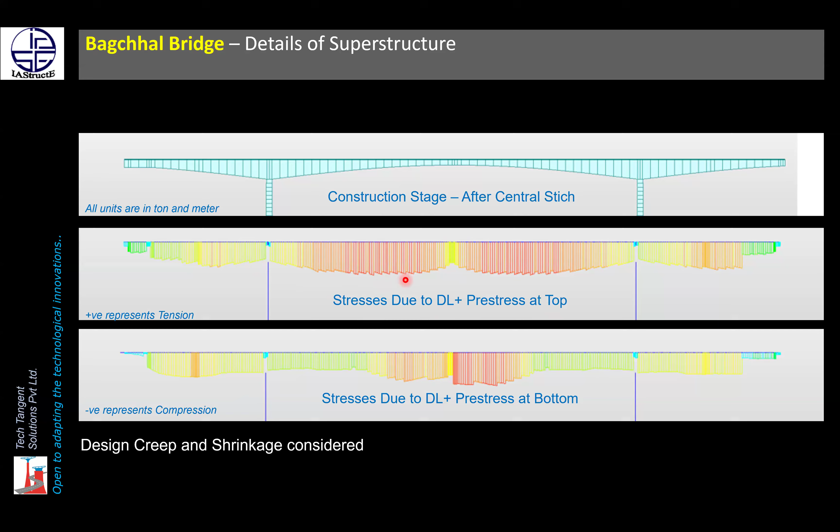So this is after stitch. Now this bending diagram you can see, because there will be some internal cables and some external cables. So all these conditions, the pre-stress moments, stresses, and all those things will happen. Here it is the stress diagram due to dead load plus pre-stress at the top. So everything is negative - below the line is negative, and here also at the bottom.

I think this diagram is much clearer, that stresses under the basic condition, we do not have any tension at any location throughout the length of the bridge. However, we have provided untensioned reinforcement at this zone because the stresses under temperature were exceeding zero. So that was not allowed, and reinforcement has been provided in the deck, soffit, and all sections. So if it is tension in the top, you have to provide reinforcement at the top to take care of the tension; if it is at the bottom, you have to take care of reinforcement for the bottom.

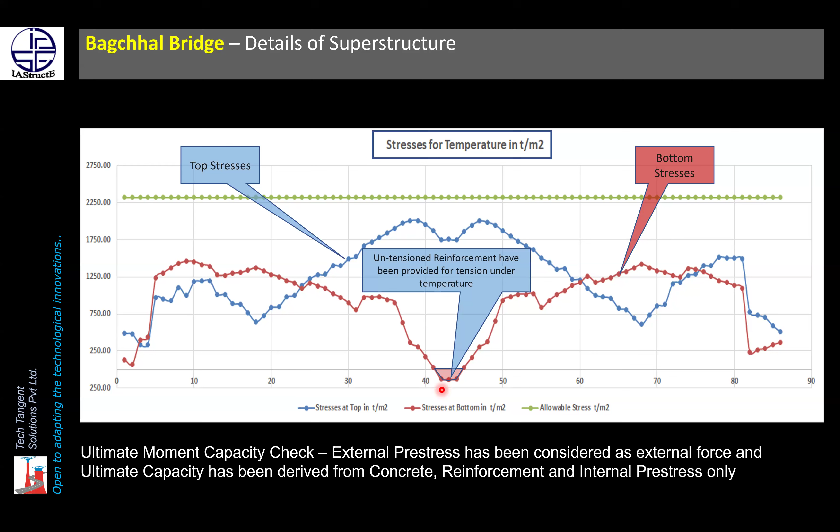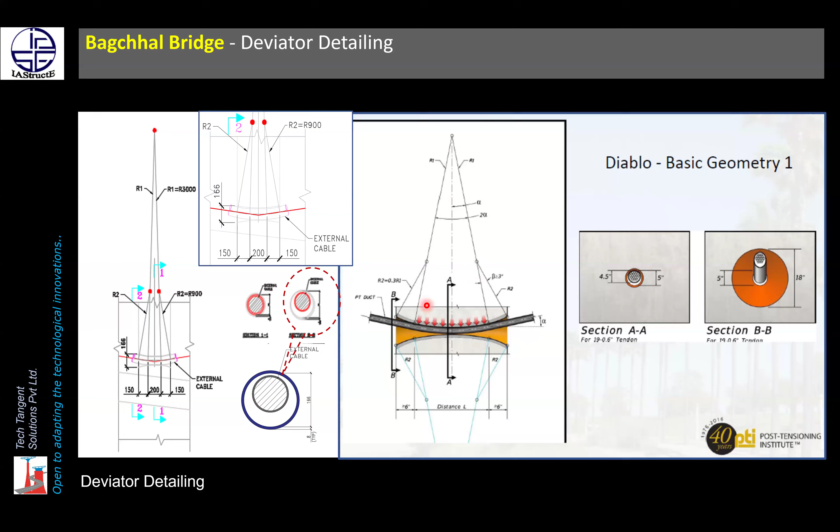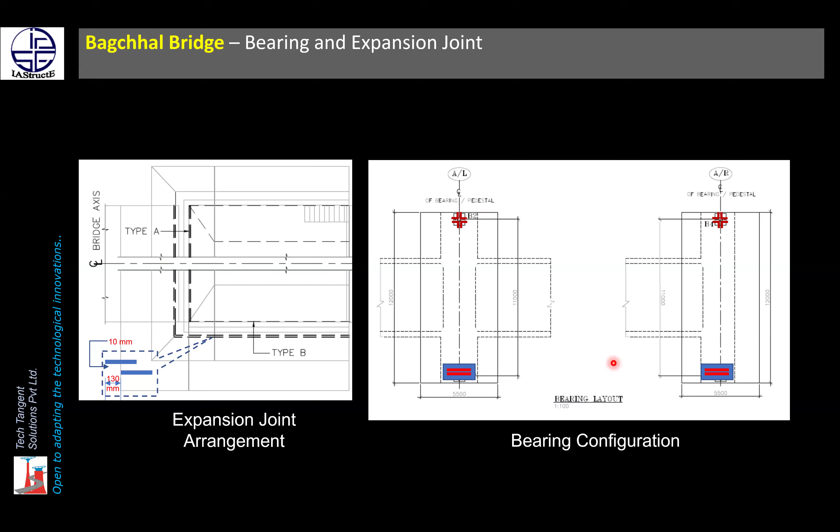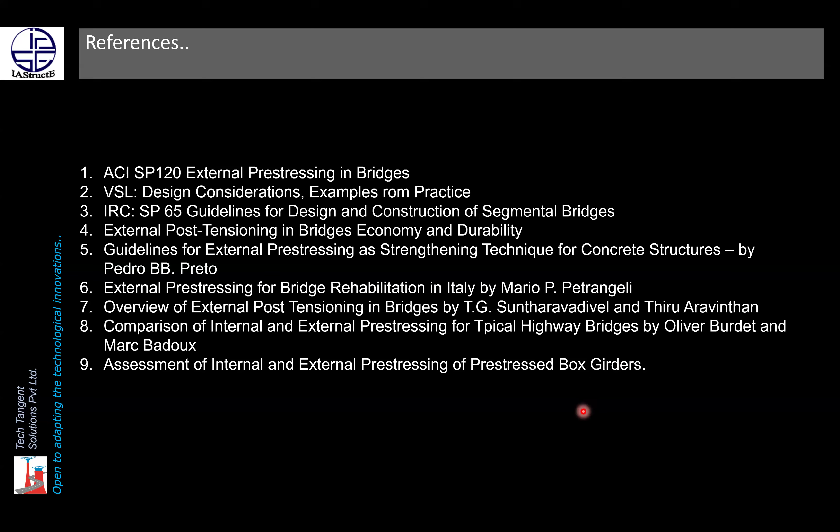I would like to say, again, that it is teamwork. Everybody has contributed: PWD Himachal Pradesh, Gammon, of course IIT Roorkee, B&S Engine Consultant Private Limited, who were our proof check, and Tech Tangent Solutions. There are some references we have given so that if any engineer wants to understand further direction or any guidance, they can just go through these references also.

Thank you. Thank you very much. I hope, I'm not sure, but I hope I have done justice to the story of the Bagchhal Bridge.

Thank you. Thank you. One second, sir. Yeah. I think if you can just stop sharing your presentation, now you can show yourself. I think it can just come.

Yes. Very nice presentation. You have done justice to your presentation, as you said. One has to understand how this particular bridge was conceived. There were a lot of constraints. Because of the constraints, the bridge was to be conceived as an asymmetrical bridge. On one side only 62.5, and on the other side a 72.5 cantilever was provided, because on one side the hill was very near, as rightly said.

Mute, Mr. Dhawan. Yeah, it was an almost impossible task to do the foundation within 3 months and complete the contract within 24 months. Under such circumstances, after extensive geotechnical investigation and geological studies, it was decided to adopt an excavated shaft, similar to a drilled shaft kind of foundation. We went ahead with the design and construction, and the design was completely approved by IIT Roorkee after going into the depth of everything, and also scrutinized by the clients themselves.

So this bridge was in progress as per the schedule till the geotechnical surprise was encountered. After the first season, the water receded and we had to continue with the work, and it was seen that one side of the foundation, especially on the P2 side, had eroded. On the basis of the rocky stratum and the socket resistance, it was designed as an excavated shaft.